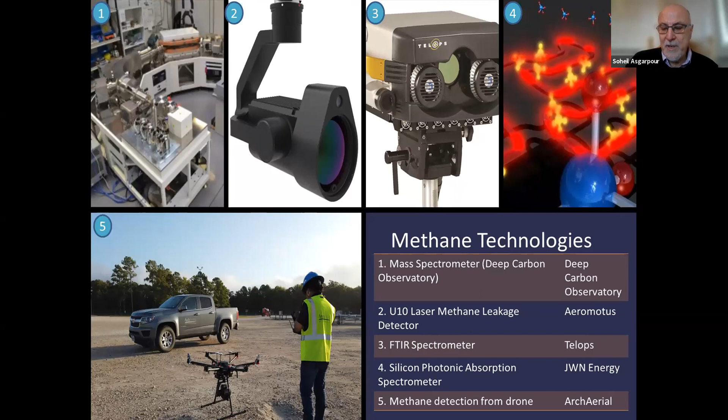For many years, the global impact of methane emissions remained under the radar because it is odorless and colorless. However, technology has changed this concept and perception.

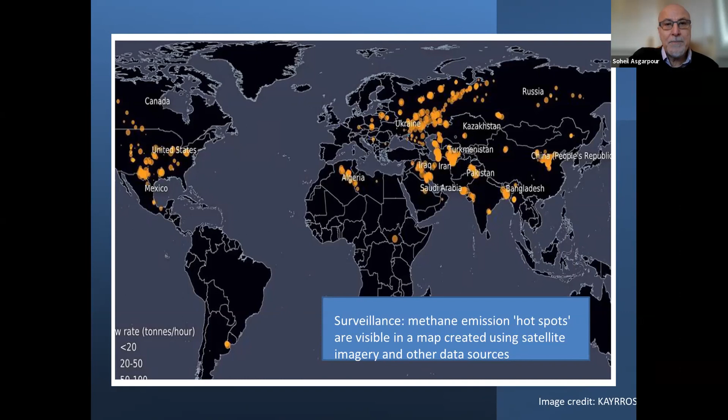Methane is the second largest greenhouse gas. The current annual global methane emissions are around 570 million tons, of which approximately 40% of the emissions are derived from natural sources. That would be sources like wetlands and forest fires, etc. 25% is from agriculture, 23% from oil and gas, and the remainder from landfills.

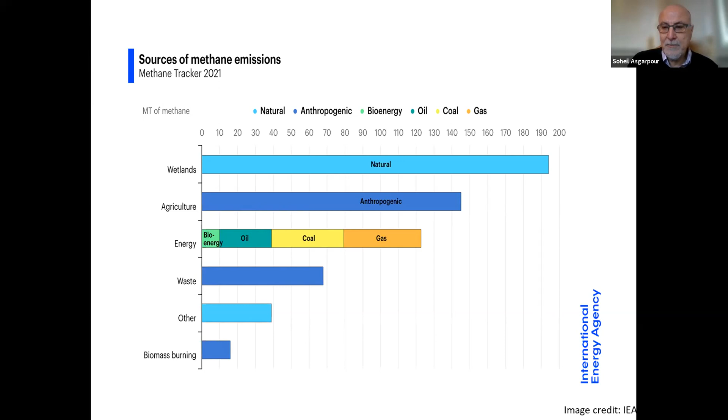The impact of various greenhouse gases is determined by the duration of time they remain in the atmosphere and their ability to absorb energy. Although methane has a much shorter lifespan, around 12 years compared to centuries for CO2, it is by far a more potent greenhouse gas.

To estimate methane's effects on global warming, the most commonly used method is the global warming potential, GWP. Eddie actually mentioned this. This method considers methane to be equal to somewhere between 28 to 36 tons of CO2 equivalent if you are looking at it over 100 years.

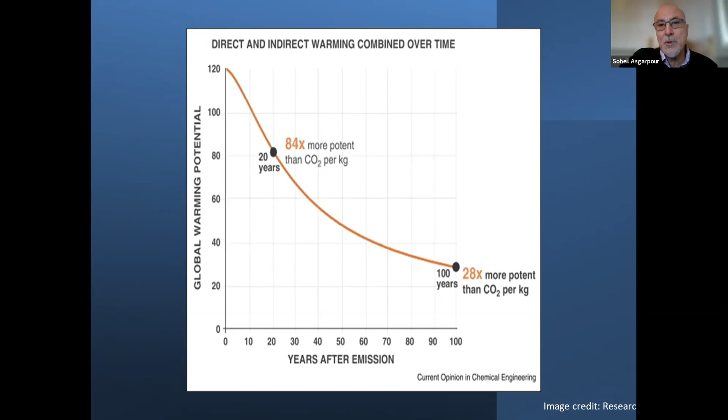But let's look at it over just the next 10 years. It's 90 times. And why I'm saying that, because the IPCC has stated that the next 10 years will be the most crucial in controlling climate change. So if you look at it during that 10-year period, then essentially the impact of methane becomes almost equal to the impact of CO2. So it's extremely potent, as I mentioned.

Sources of methane emissions are fugitive, which is unintentional, and venting, which is intentional. The largest sources are venting from oil and condensate tanks and pneumatics, etc. Our current studies indicate that this information is going to change, because we are seeing more impact coming from oil tanks and condensate tanks than pneumatics. Those studies are going to be public very soon.

I should also say that methane vented from oil and gas affects not only our environment, but also our health. This sounds daunting, but reducing methane emissions provides tremendous health, environmental, and economic benefits. And talking about economic benefits, I think reduction of methane emissions is the fastest and most cost-effective approach in reducing greenhouse gas emissions globally. Methane, unlike CO2, has commercial value.

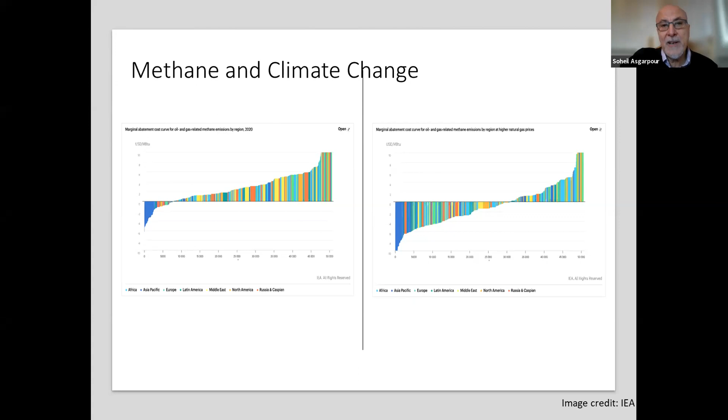Methane is the key to creating a clean Canadian oil and gas brand. Methane reduction allows more natural gas to be sold for profit while simultaneously improving our environment. Finally, methane is the catalyst where traditional oil and gas and leading-edge clean tech meet. It has the potential to forever change how we do business by helping small and medium-sized clean tech companies prosper nationally and internationally. And later on, you can see our game plan to do so.

According to the Energy Information Administration, EIA, the future of electrification is here, and natural gas is going to play a very important role in supporting the energy transition. The EIA expects the demand for natural gas for generating electricity to go up by 25% by 2050.

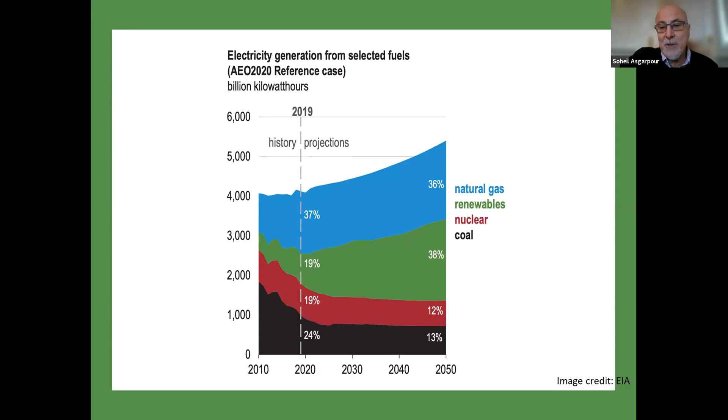Eddie actually articulated this really well. Natural gas can be converted to hydrogen or can generate clean energy, but the key is to make sure that we reduce methane emissions from production, processing, and transportation of natural gas. So let's talk about PTAC's initiatives.

More than a decade ago, we started working on initiatives to reduce methane emissions. We formed the Methane Emissions Reduction Network to be an innovation network with a vision to build methane detection and mitigation technologies, with the goal to help build enough technology capacity to reduce 45% of the 2012 level methane emissions at a cost of less than $5 per ton of CO2 equivalent by 2022. Actually, we have achieved that target now, and 90% by 2030.

The network developed a technology roadmap. It connects people, ideas, projects, technologies, capital. It works in collaboration with Clean Resource Innovation Network and Canadian Emissions Reduction Innovation Network, CERIN. It launches and holds numerous seminars, webinars, conferences, workshops, etc. per year.

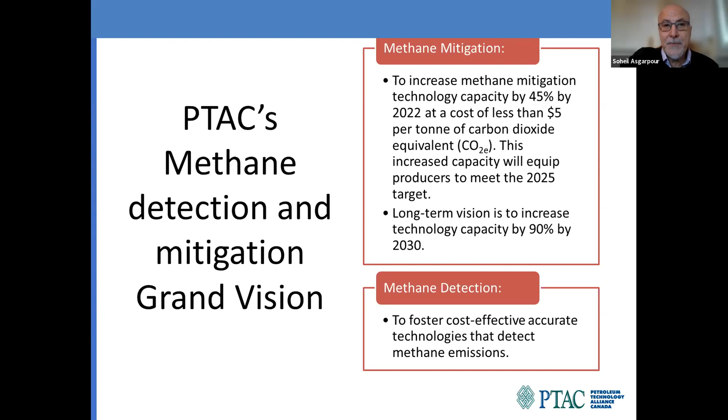I thought maybe I should start first with the low TRL, technology readiness level, of our research and development activities. So I thought maybe I should talk about the applied research work that we have done, which is about developing best management practices to reduce oil and gas sectors' methane emissions.

So throughout the years, we launched and completed over 450 applied research environmental management projects, spending over $180 million. Over 40 of these projects are dedicated to methane detection in helping producers with best management practices, while policymakers and regulatory bodies can use the scientific and engineering facts for developing smart policies and regulations. All of this work is peer-reviewed, and so it has the respect of the public and academia.

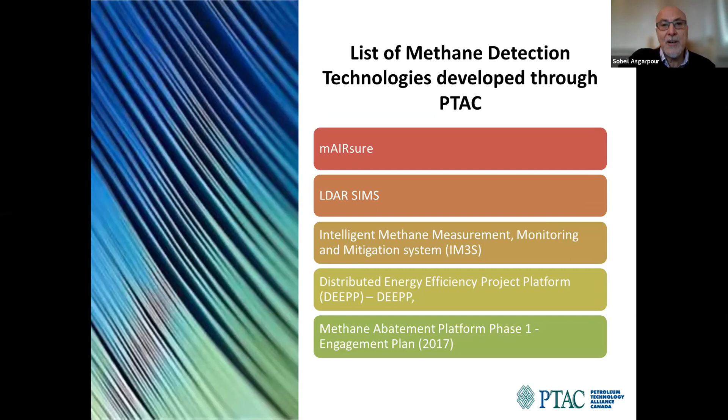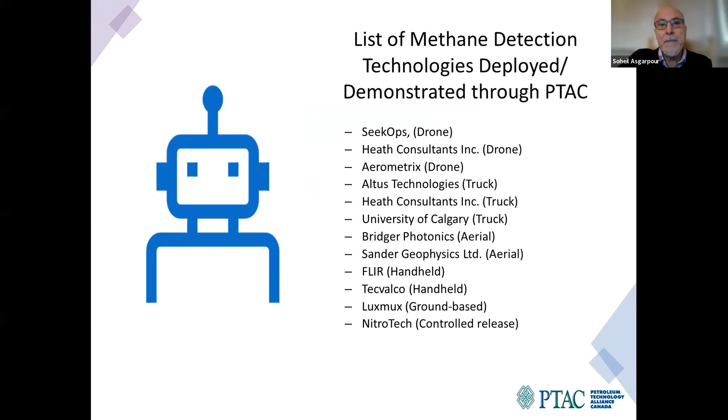In addition, we've also developed 12 technologies, mainly using various sensors, drones, trucks, etc., as you can see here on this slide. One of the biggest challenges we are facing, and we are still trying to find good solutions for it, is methane emissions from oil tanks and condensate tanks, because the emissions are very erratic. Our current focus is to find solutions, maybe even using machine learning, for this challenge. By solving this problem, I think we can get very close to the 75 to 80% methane emissions target that we are working toward.

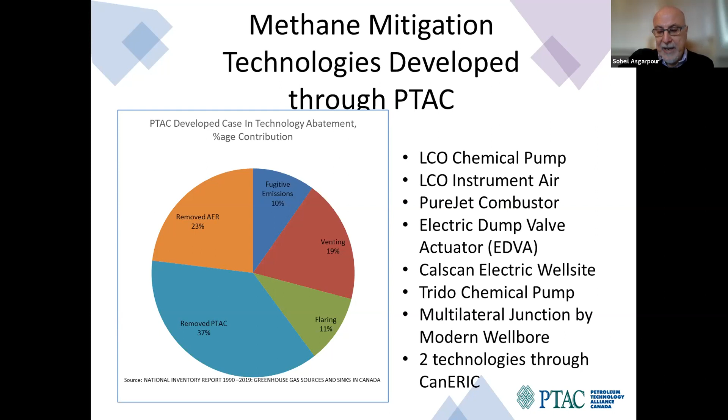Over the past 15 years, PTAC has secured funds from NRC IRAP programs, Alberta Innovates, NRCan, and Emissions Reduction Alberta to help SMEs develop their technologies. The methane mitigation technologies developed through PTAC collectively are essentially providing technologies around 37%.

But one of these technologies that we have used and is already in place is called REMVue technology. REMVue technology captures light hydrocarbons from condensate tanks, from oil tanks, and these days mainly from compressors, and utilizes it in the field for fuel. The emissions reduction is equal to taking 130,000 cars off the road annually, while also saving industry $15 million in energy costs.

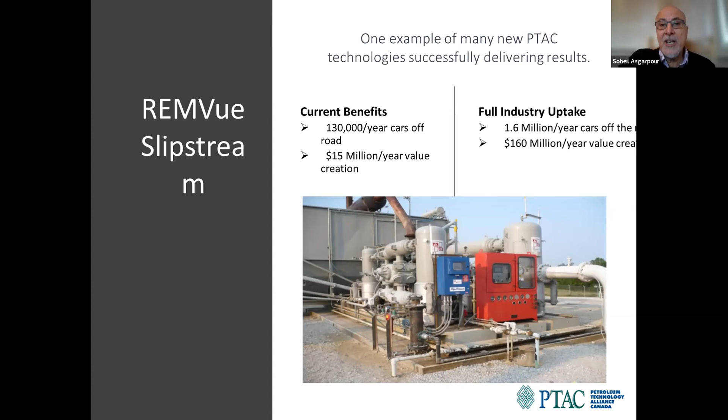Having said that, the challenge of this technology is that the uptake is still really low. This is something I'm going to talk about later on.

By securing funds from Alberta Innovates and NRCan, and with industry support, we have been able to help small and medium-sized enterprises field test their technologies at zero cost to them. So far, 3 technologies have been lab tested, 9 technologies have been field tested or developed, and 6 technologies are undergoing various tests.

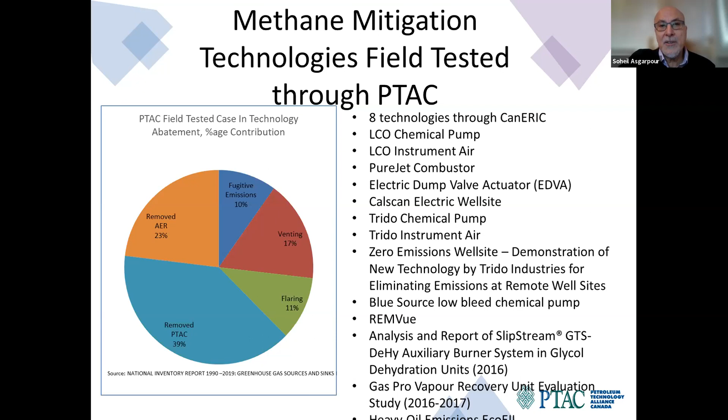Even if a technology is field tested and proven to be cost effective and reduce methane emissions, SMEs still face the challenge of increasing the market uptake of that technology. To mitigate this challenge, we launched 2 consortia that pay up to 75% of the cost of equipment and installation, encouraging Canadian producers to get first-hand experience with the new technologies, so they would do a mass deployment and increase market uptake. These aim to increase investment in massive deployment, and the results we are getting suggest it has been very successful.

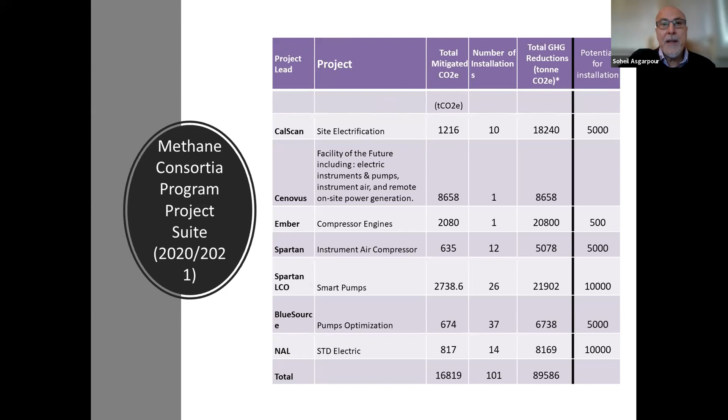Methane mitigation technologies that have been field tested and demonstrated are shown here. Again, many of them are technologies that I have talked about. Collectively, they increase the technology capacity by 39%.

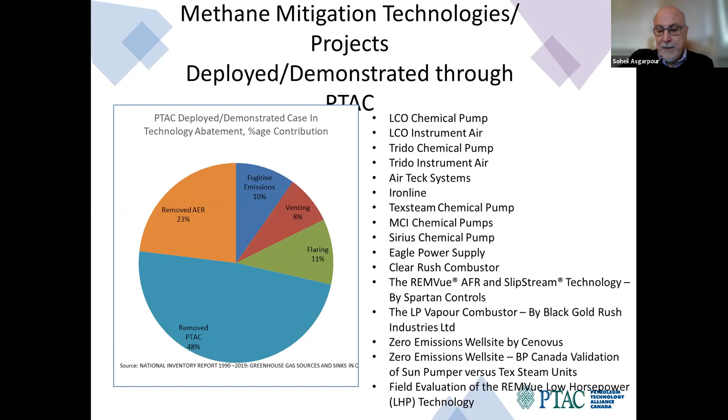To further increase the market uptake of SME technologies, we also created a guide and directory listing over 59 Canadian cleantech companies looking to bring their methane technologies to the international market. We are working with Canadian trade commissioners and Global Affairs to promote these technologies. PTAC's product market fit assessment also helps cleantech SMEs prosper. Last year alone, we completed 55 assessments with financial help from NRC IRAP and launched 20 consortia to help SMEs achieve economic prosperity. In the coming year, PTAC will launch several new initiatives to expand our international activities, including a strategic program to increase international sales of Canada's cleantech products and technologies.

In closing, reducing methane emissions requires global collaboration. It is through this collaboration that PTAC has achieved so much. So we really need to work with everybody to get good results on achieving net zero.

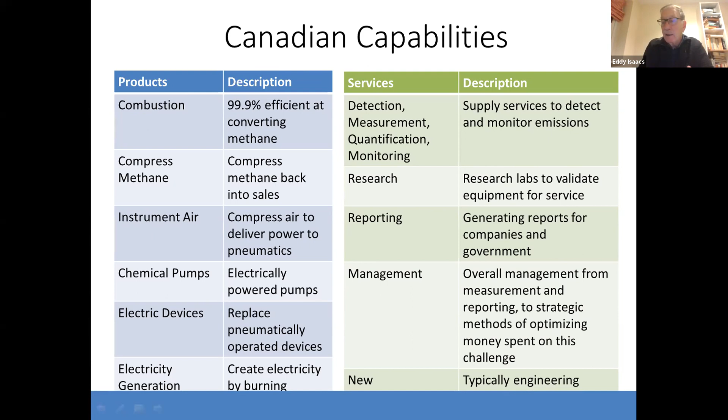And back to you, Eddy. Well, thanks very much, Soheil. This is an impressive amount of work that's happened. Maybe because I went away, a lot of good things have happened, and congratulations. It is the other way around, Eddy. You actually essentially set the foundation for everything that has happened here. So I don't know how to really thank you. Yeah. Really impressive, and thank you very much for your presentation.

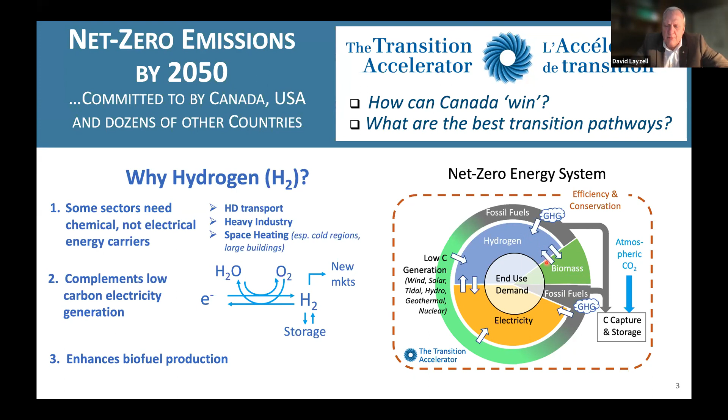I think it's important to recognize that we already, in Canada and around the world, have a very vibrant hydrogen economy. In Canada today, we make about 8,200 tons of hydrogen every day. And that hydrogen is involved with producing a greenhouse gas emission. It's called gray hydrogen. For every ton of hydrogen, there's around 9 or 10 tons of CO2 going into the atmosphere.

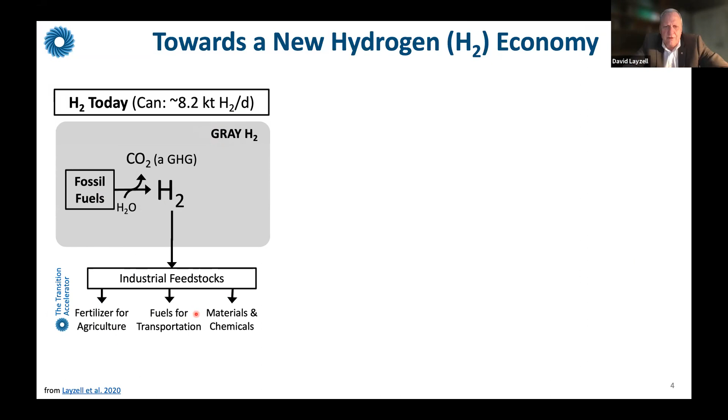That hydrogen is used to make fertilizer for agriculture, to make fuels for transportation. It's used to crack bitumen into synthetic crude oil, or to convert various kinds of crude oils into gasoline, diesel, jet fuel, et cetera. And it's used to make other chemicals and materials.

As we look to a net zero future, what we're looking at is changing the way that we make the hydrogen. We could still use fossil fuels or even use biomass, but instead of releasing the CO2 to the atmosphere, we can capture that CO2 and geologically sequester it. We can also make hydrogen from renewables or nuclear or other low carbon sources of electricity and use the electricity to crack water into oxygen and hydrogen. And there's also some hydrogen produced as byproducts of chemical process plants like chloralkali or sodium hydroxide plants.

And the vision is that in this new hydrogen economy, the hydrogen's not only used as an industrial feedstock, but used as a fuel in its own right, as an end-use fuel to support transportation, building, industry, and power generation, and even to be an export product for Canada, which is a significant opportunity.

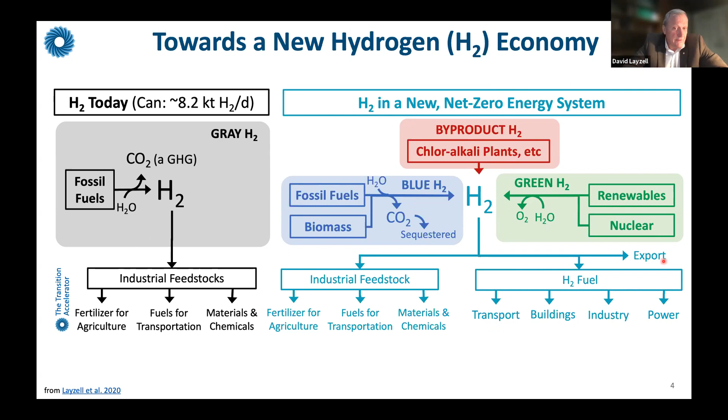So let's look at the value chains in this new hydrogen economy. How do we envisage this hydrogen economy looking by mid-century? Well, we talked about green hydrogen production, where low carbon, zero emission electricity is used to crack water into hydrogen and oxygen. There's also a possibility of blue hydrogen, biomass or natural gas or oil going through gasifiers or reformers to crack those into hydrogen and carbon dioxide. The carbon dioxide obviously has to be kept out of the atmosphere. So that's the first part of it.

The oxygen that's produced from the electrolyzer, most times today, is simply released to the atmosphere. But in a low carbon net zero energy system, that oxygen can be used to replace the oxygen in the atmosphere. And that allows us to maybe continue to use natural gas or other forms of fossil fuels. But because the gas produced as an end result contains no nitrogen, because you're not using atmospheric nitrogen, it contains virtually pure CO2 or CO2 and water. You can remove the water relatively easily and get virtually a pure CO2 stream that can be sequestered geologically.

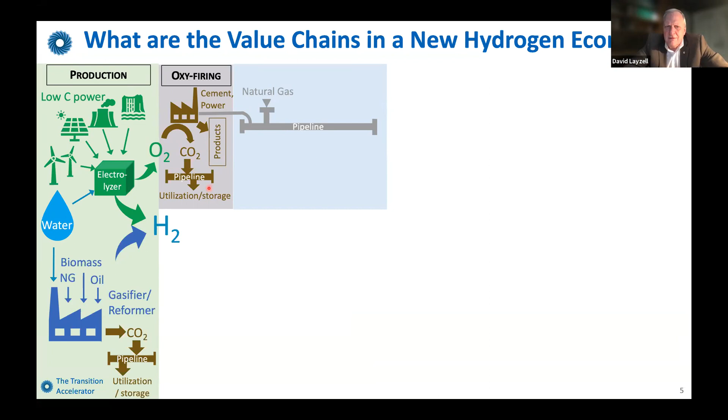And this can allow us to run cement plants or even power production on fossil fuels with pure oxygen. And there's an opportunity that opens up with lots of green hydrogen production.

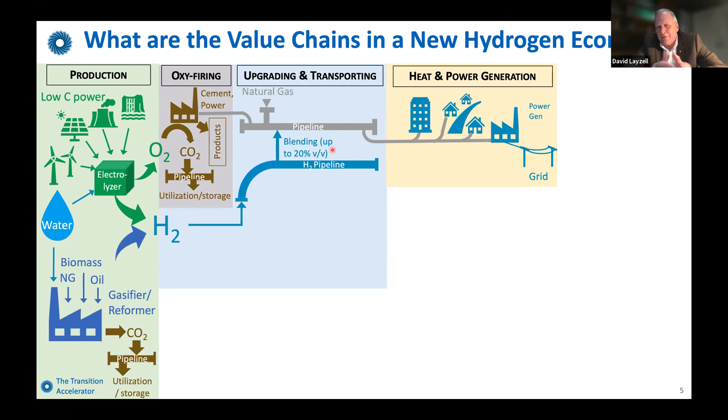The hydrogen could be used, and this is some of the early stages of hydrogen use in energy systems, often in Europe and also starting in Canada, where the hydrogen can be blended into natural gas to help start to decarbonize our existing systems, for example residential or commercial buildings, or even power generation. Blendings of up to 20% by volume, which is only about 7% or so by energy content, you don't typically need to change much infrastructure. You can use the existing infrastructure. But obviously, that's not going to get us to a net zero energy system.

What is being looked at a lot in Canada and internationally is the possibility of putting pure hydrogen into space heating for residential and commercial buildings, or even pure hydrogen for power generation. That will require some new equipment: new burners or new boilers, furnaces, cook stoves in houses, or gas turbines for power generation.

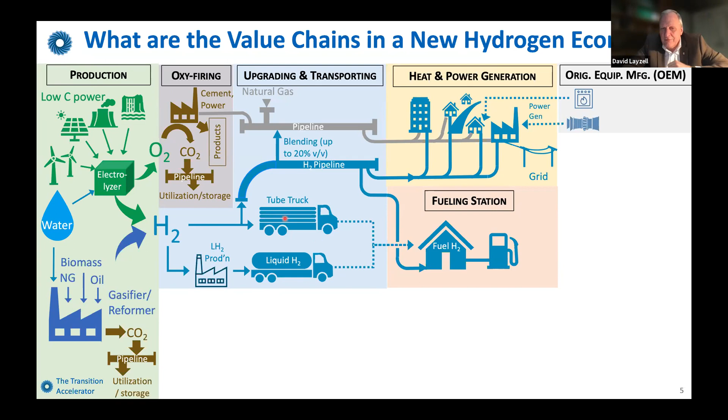The area where hydrogen is often seen as having the biggest opportunity is transportation, especially heavy vehicle transportation. In which case, hydrogen can be taken from a hydrogen pipeline and delivered to a fueling station, or the hydrogen can be compressed into a tube truck, and each tube truck can hold perhaps up to 1,000 kilograms or 1 ton of hydrogen, which isn't very much actually, which makes the tube truck rather an expensive way to move hydrogen around. Or the hydrogen can be reduced in temperature to about 253 degrees Celsius below zero, and it turns into a liquid.

And the hydrogen then can be put onto a truck as liquid hydrogen in a cryogenic container and delivered to the fueling station. And of course, the opportunity here is to use that hydrogen to support heavy vehicles in particular, everything from airplanes and trains and ships, off-road vehicles, a lot of Class 8 trucks and bigger vehicles that are used a lot, municipal buses, etc.

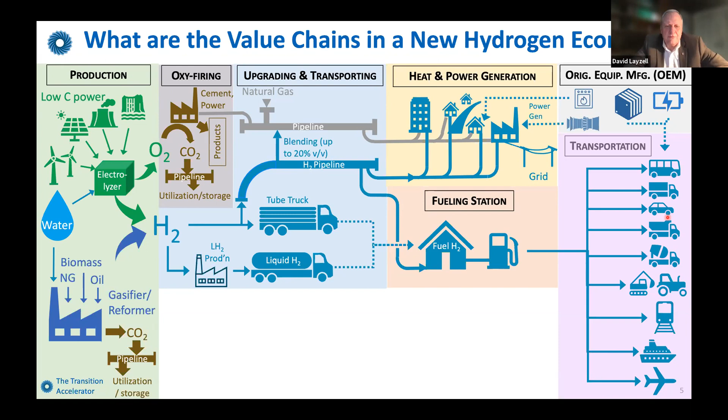There is a role perhaps for cars, but it's probably only not for personally owned vehicles, but for fleets of vehicles that are used very heavily and over long distances. And we'll talk more a bit about some of these alternatives.

Then the other part of the hydrogen economy that there's a lot of interest in Canada and internationally is the possibility of using hydrogen as an energy carrier for export. And this could either be done as exporting liquid hydrogen production, perhaps by train to tidewaters where it puts on a ship, or one that is really getting a lot of attention in the last couple of years is converting the hydrogen to ammonia.

Traditionally, that's thought of as a fertilizer. But hydrogen and ammonia is a lot of energy embedded in those molecules, and that can be supplied for export markets. And indeed, Japan has made it very clear they want to import millions of tons of ammonia per year as an energy carrier.

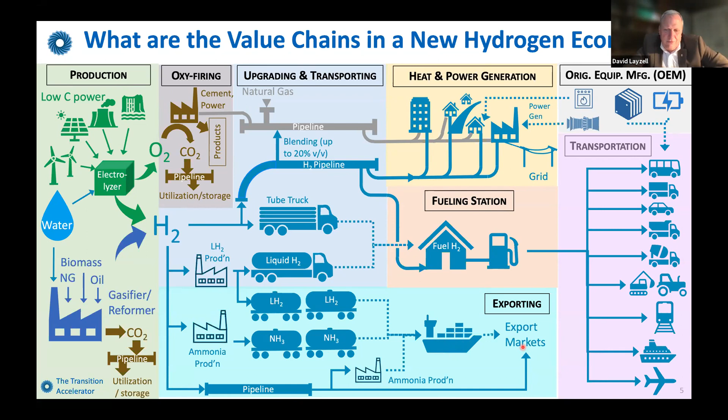And that could either be produced and taken by train, or perhaps a pipeline that would take ammonia produced at the coast. And of course, there's a possibility of pipelines delivering hydrogen to other jurisdictions in North America, et cetera, from Canadian sources. So Canada has an opportunity because we're internationally recognized as amongst the world's lowest cost producers of both blue hydrogen, that's made from carbon-based sources, and green from electrolysis.

So Canada has low-cost blue and green hydrogen, but what about its environmental footprint? The analysis is that in the process of making hydrogen with carbon capture and storage and using a process like autothermal reforming to make the hydrogen and then capturing the CO2 and sequestering it, that drops the carbon intensity of the hydrogen down to about 0.5 or 1 kilogram of CO2 equivalent for every kilogram of hydrogen.

But then you have to add on the upstream emissions, basically the methane emissions that Soheil just talked about. And in our estimate, that adds another 2 kilograms of CO2 per kilogram of hydrogen, for a total of 3 kilograms of CO2 per kilogram of hydrogen. And that's the best we can really get to today.

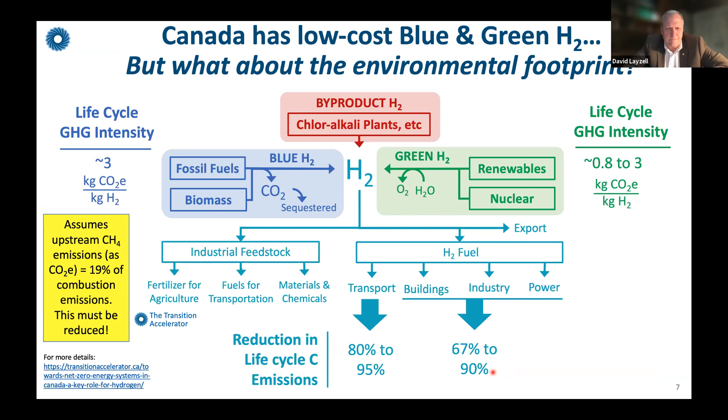It's more difficult today for green hydrogen to hit that target market without subsidies, but the cost of green hydrogen production is coming down with lower cost of electrolyzers and lower cost of solar and wind in strategic locations.

When you have the right conditions, and when you couple solar and wind to electrolytic hydrogen, green hydrogen should be able to get down around the $2 a kilogram range by 2030 in certain regions.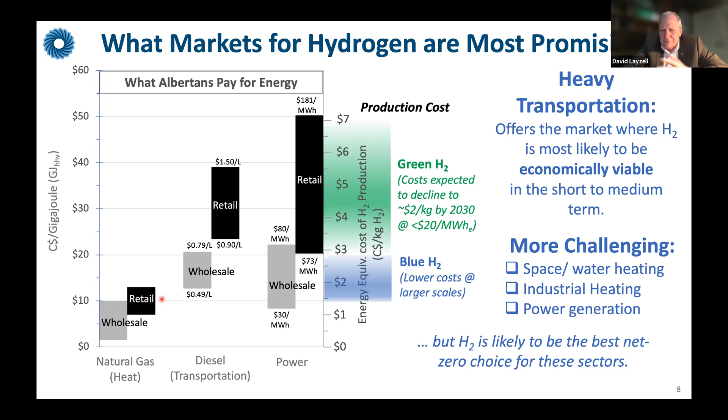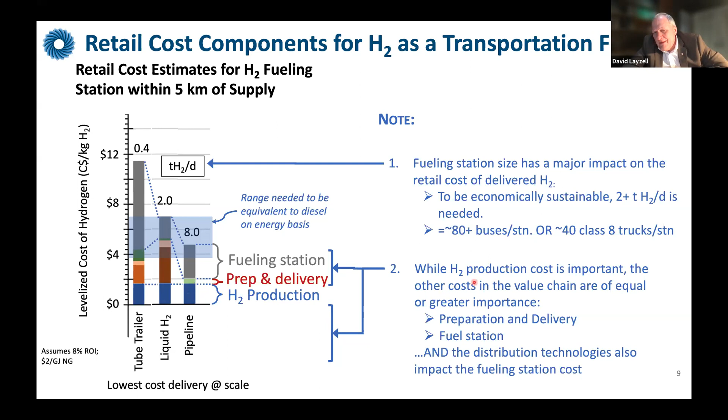The cost of the other parts of the value chain are of equal or more importance: preparation and delivery, highly variable depending on whether you're doing tube trailer, liquid hydrogen, or pipeline, and also the cost of building the fueling station itself. It costs a lot more to build on a tube trailer basis than on liquid hydrogen on the same basis. But with liquid hydrogen, the fueling station cost is lower because the compression can be handled a lot with the liquid hydrogen as you gasify. Pipeline can be some of the lowest cost, but it depends a lot on where you are, the size of the station, and what other demands are in the region for hydrogen.

So I think this is really important to understand: the choices that are going to be made are going to depend very much on region and locality.

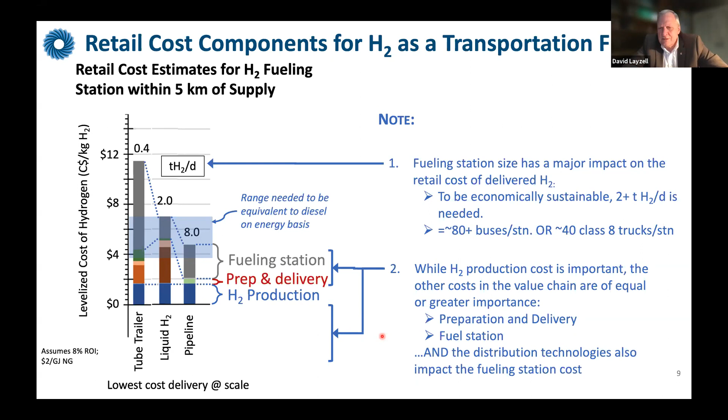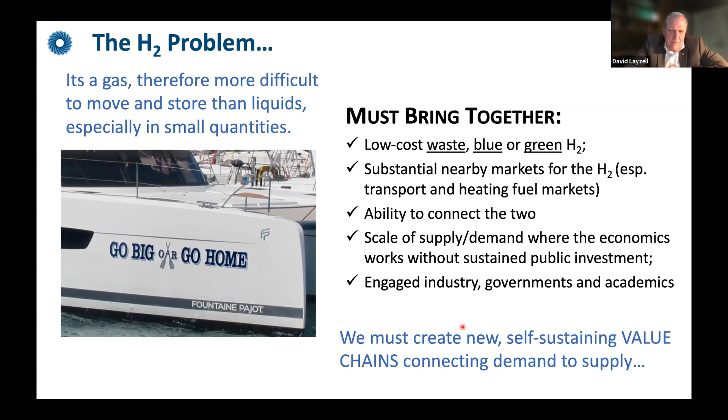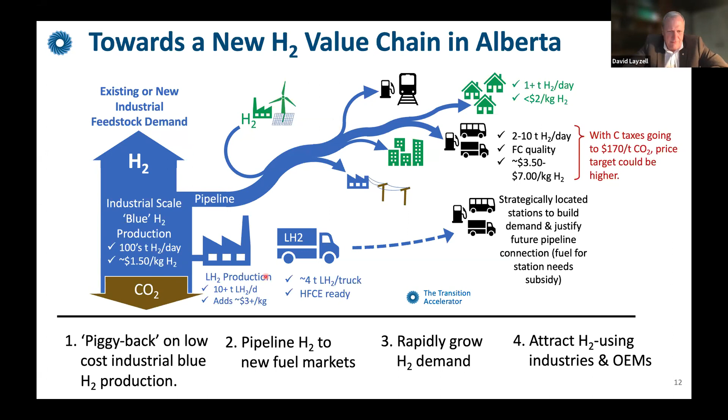There's certainly a role for liquid hydrogen, especially in the early stages of growing this out, but it adds about $2.50 to $3 a kilogram to the price, which makes the economics a little more challenging. But this is the approach we've been using.

And in Alberta, Alberta is already a major center. We talked about Canada producing 8,200 tons of hydrogen, two-thirds of that produced in Alberta for use as industrial feedstock. Within the Edmonton region of Alberta, we already have a lot of the infrastructure, built over the last 20 or so years. There's a 50-kilometer long hydrogen pipeline and 2 CO2 pipelines. The Quest CO2 pipeline goes to the Saline aquifer storage, and the Alberta Carbon Trunk Line is used for enhanced oil recovery.

If you look at this region itself, it's about 2,000 or 2,200 tons of hydrogen per day, a little more even. Some of it, there are 3 plants up here that are actually already making a form of blue hydrogen where they're capturing the CO2 and putting it into these pipelines that we show here.

And indeed, in the last 6 months, we've seen a number of announcements where, both in the Alberta Industrial Heartland and other places in Alberta, there are major announcements of blue hydrogen production initiatives. Suncor and ATCO are talking about major blue hydrogen production, that'll be later this decade. Air Products is talking about one, only about 3 years from now, where they'll be producing 800 to 900 tons a day of hydrogen.

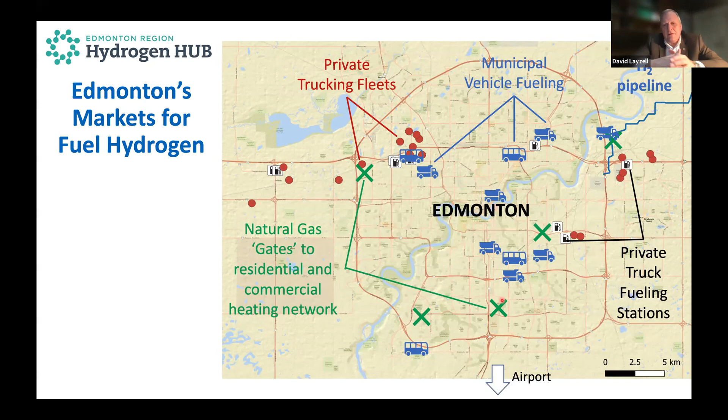We also see here the green X's are the gates where high pressure natural gas is dropped to low pressure, and we see the ability to then inject hydrogen into natural gas systems for space heating for commercial and residential buildings. What I want you to note here is they're on two corridors, which happen to be the industrial corridors through the city. This opens up a really interesting opportunity to put pipeline infrastructure. Indeed, in this corridor in particular, and in the one coming down into the south part of the city, there are a number of abandoned or discontinued pipelines that could possibly be retrofitted for hydrogen movement.

Overall, we've estimated a market potential in Edmonton alone, just in this region, of about 670 tons of hydrogen per day for transportation. That's mostly the diesel market, a little bit of a gasoline market. Building heating could be another 1,500 tons a day to support the space heating if we went to 100% hydrogen, plus export markets of many thousands of tons per day of potential export markets.

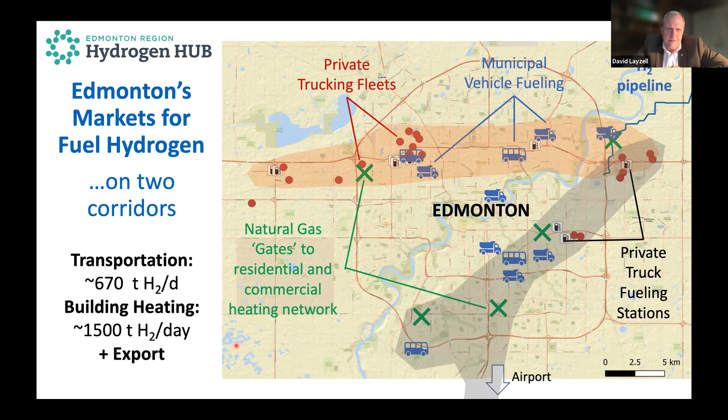So let's just now talk a bit about some of the issues around this new value chain, and where is the power and control in this value chain, and how does it compare maybe to some of our existing value chain for heavy transport in this sector.

And of course, this is challenging because this sector happens to be highly competitive, and they don't tend to work collectively as much as perhaps some other sectors. And they're smaller companies, literally 17,000 companies in Alberta alone in that sector for heavy vehicle transport.

The OEMs and the retrofits, now these tend to be global companies. And Canada is competing for their attention to build vehicles that will actually meet the needs of our markets. When you consider the weather we have, especially in Alberta with the snow and sleet and everything else, it's much more attractive for them to focus their attention on places like Arizona or California than Alberta. But the reality is that when we talk to them, the most important thing they're looking for is that the key stakeholders want to buy their vehicles, and that will get them to work with us.

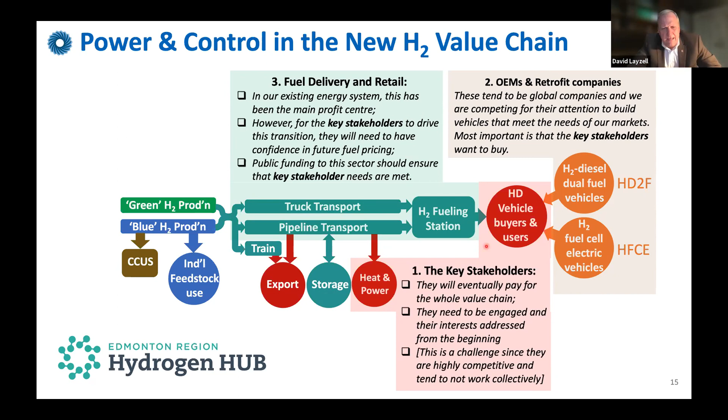And then finally on the fuel supply, the reality is that the companies that are making hydrogen and can make blue hydrogen and green hydrogen, there's a lot of them out there who see the possible economic opportunities in this new value chain, and they're very keen. They're also asking for public subsidies, but they need to be tied to, again, some level of confidence in the prices of the fuel, at least until a competitive economy exists in this area.

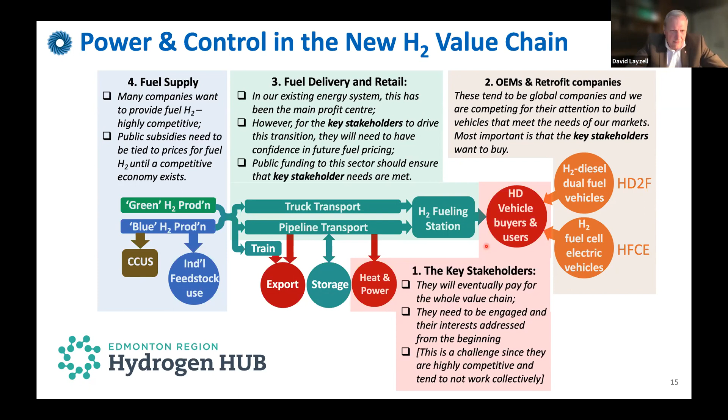So in the Edmonton Region Hydrogen Hub, which has been set up around the incredible opportunity in the Edmonton region, we've been doing a number of projects that I'll mention very briefly before I wrap up. First is AZETEC. We're designing and building two 63.5-ton gross vehicle weight trucks. These are very large trucks, and they're going to be running the Edmonton and Calgary route. They're being designed by Dana Transport and Ballard, with a project run by the Alberta Motor Transport Association, and the estimated time of arrival will be January, a year or 14 months from now, when they'll be on the roads.

There is the AZEHT project. This is a zero emission hydrogen transit project involving Edmonton Transit, Strathcona, Calgary, and Roam. But Edmonton and Strathcona in particular, two hydrogen fuel cell electric buses. We just received the funding for this, and those buses will be on the road in August 2022.

CP Rail has announced some really exciting work that they're doing. They're putting 3 diesel electric locomotives on the rail. The first one will be on the rails, not on the road, in 2022.

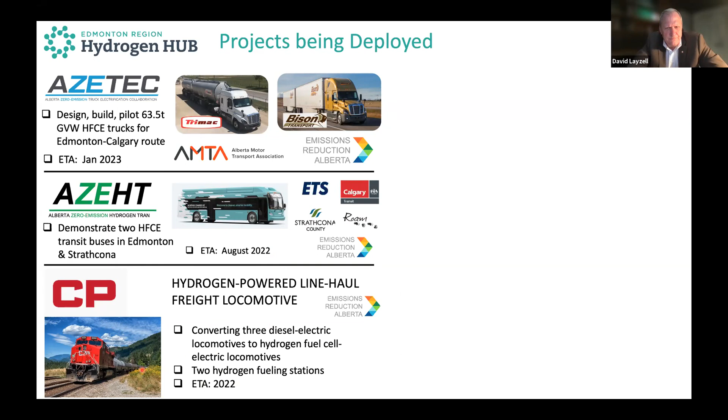Then we're looking at a number of companies and a number of projects on hydrogen diesel dual fuel technologies, where hydrogen is injected into the diesel engine and it improves the combustion of the diesel fuel. But what it really does is it replaces about 30 to 40% of the diesel fuel requirement. And we see this as a really important bridge technology for creating fueling station demand and building out the fueling station network while also reducing emissions.

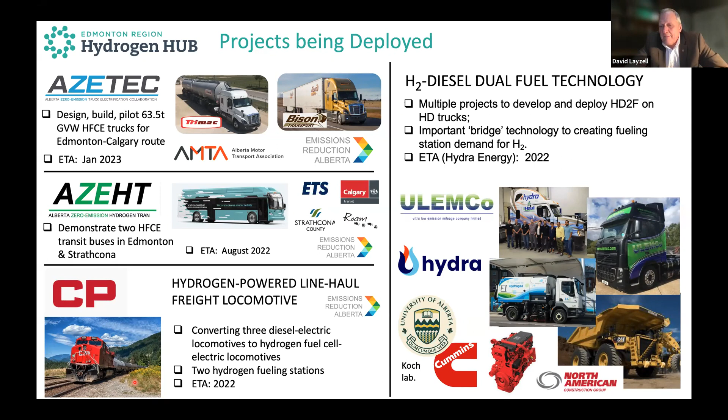We see fuel cell vehicles as a long-term solution, but this is an interim solution, which in our models is really important in keeping the need for public subsidies down and really deploying rapidly a hydrogen economy in the next few years.

We're also working with the Alberta Motor Transport Association to run a roadshow where we're taking hydrogen diesel dual fuel vehicles and fuel cell electric vehicles that are commercially coming out in the next year or two in North America, and providing carriers hands-on experience. And we just received some funding to get this off the ground. We hope to see a lot more.

We've been working with a number of companies about the concept of providing the fueling stations, and Suncor in particular. It's been announced recently that we've got some funding. The first fueling station will be going in in the next few months to serve some of the projects I've just talked about. And we're hoping to see a major expansion in that area.

There's also a number of projects that have been launched in Alberta, and I've just mentioned 2 of them I think are quite important. One is looking at actually making hydrogen directly from natural gas without the steam methane reforming or autothermal reforming, doing it by methane pyrolysis, where you produce carbon black instead of CO2. And the carbon black then can either be converted into rubber tires or paints, or basically make something else with the carbon black, just keep it out of the atmosphere as CO2. And ATCO is looking at blending 5% hydrogen into its Fort Saskatchewan infrastructure for space heating in Fort Saskatchewan.

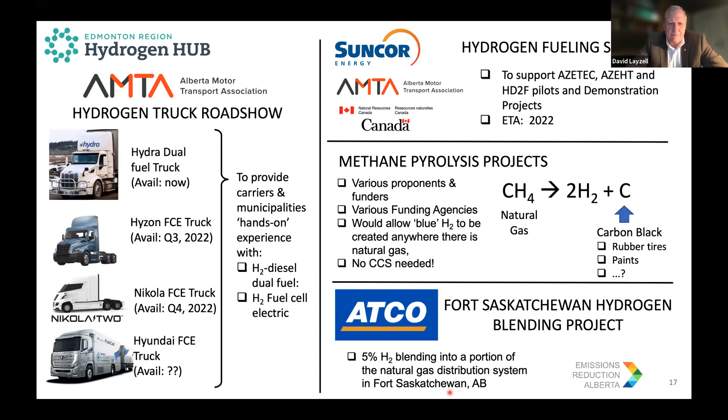So what is the magnitude of the opportunity? Very briefly, I would like to touch on 4 things just to give you a sense. They're all focused on Alberta. I'm sorry, I know this is more about pan-Canadian, but this gives you a sense of the scale of the opportunity. Alberta uses a lot of diesel fuel. Almost 280 petajoules of diesel per year is shown here.

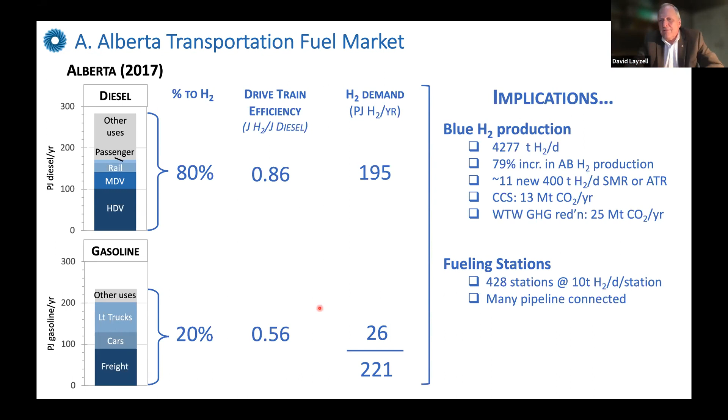If 80% of that went to hydrogen, and hydrogen in a hydrogen fuel cell electric has a drivetrain efficiency where a joule of hydrogen will take a vehicle further than a joule of diesel fuel, there would be about 195 petajoules demand; when you add some from the gasoline, maybe 220. This would require production by 2050 of an additional 4,200 tons of hydrogen per day, which is about a 79% increase in the current Alberta hydrogen production of about 5,400 tons a day.

And that would require CCS, carbon capture and storage, of about 13 million tons of CO2 per year, and over 400 fueling stations at 10 tons a day. These should be highly economically viable. Some fueling stations would be larger than that, of course.

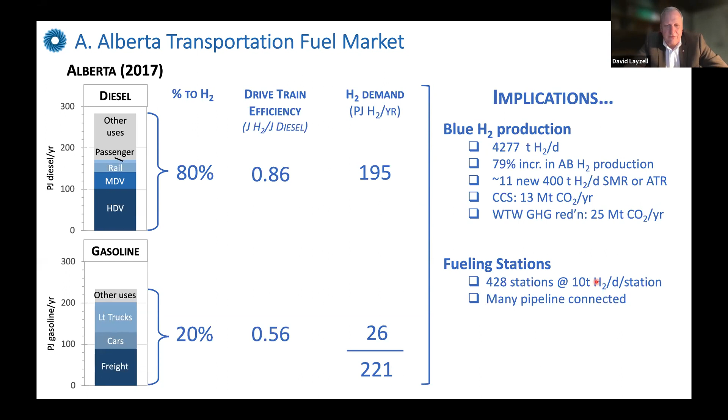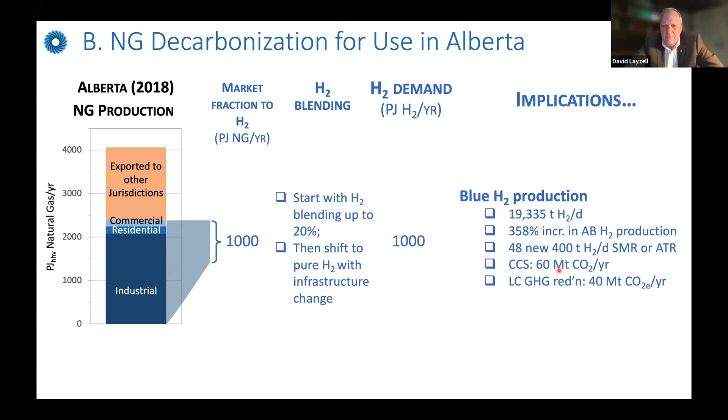If we could look at the natural gas we now export mostly to the United States or to other provinces, this is exported to other jurisdictions. And we're saying, if 80% of that, if say they didn't want our natural gas anymore, but they wanted hydrogen, that would be, at 1,340 petajoules, 26,000 tons of hydrogen per day, another 81 megatons of CO2.

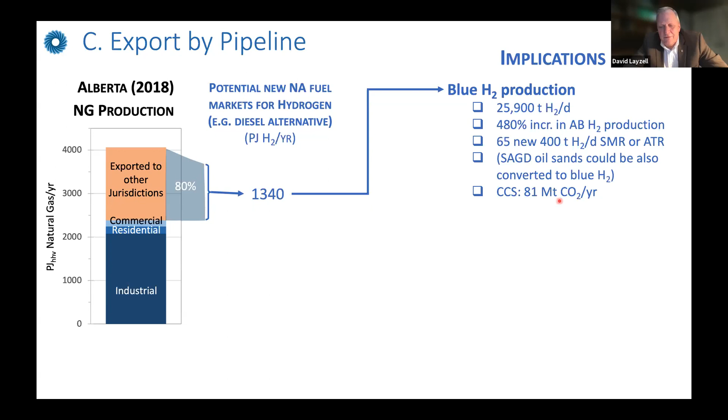Now, green hydrogen could also play a role in this, but to put it in perspective of the scale, if you wanted to make the 26,000 tons from wind, 147 gigawatts of new wind generation would be needed, which is 87 times the current wind generation capacity in Alberta. It's almost 25,000 6-megawatt wind turbines. So there is a market, I think eventually, for both green and blue hydrogen.

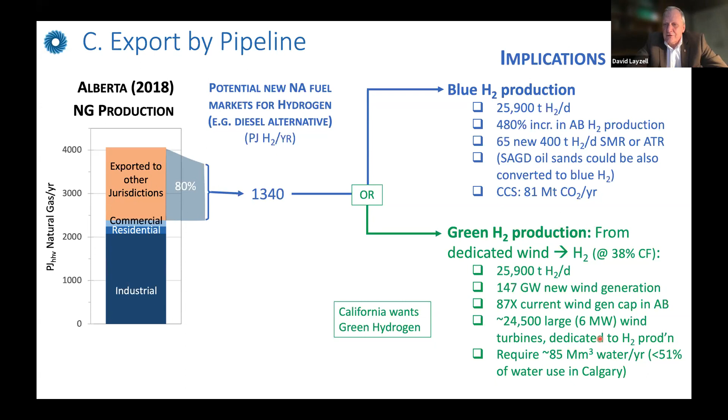I think blue is more likely because of its cost benefits and the ability to get to scale quickly, more likely to build out some of the infrastructure, opening up the opportunity for more and more green as we go on.

And then finally, moving hydrogen to Asia. I talked before about the two interests, either moving it as liquid hydrogen or as ammonia. There's also liquid organic hydrogen carriers that are possible. There are different ways of getting the hydrogen across.

Market demand already is over 8,000 tons of hydrogen per day in Japan by 2030. So we're talking very significant opportunities and economic opportunities. A lot of companies are interested in taking and moving on this opportunity.

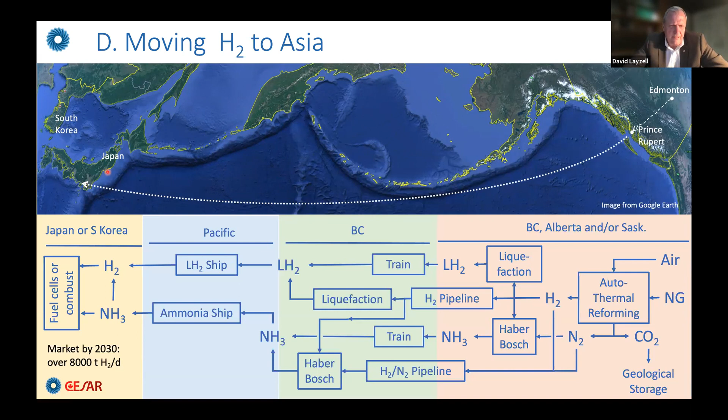So in conclusion, many nations of the world, including Canada, are committed to this transition to a net zero energy system. Canada's poised to lead in this transition because we've got really low cost blue and green hydrogen, and we need to focus on these hubs and corridors to build out demand. And I would argue we need to start right now. Thank you.

David, that was an excellent presentation. You have provided us with exciting ideas, possibilities, new pathways to create, I think, a new industry. And you've described potentially huge opportunities as we move forward with hydrogen as a part of the value chain. So thank you very, very much.

That's excellent. The two of you have done a masterful job, and we are now ready to move into a panel discussion. And I invite each of you to ask each other some questions. As a moderator, I was hoping to be the first to ask questions, but since we've got some excellent questions that have come in, I will start with Soheil and move on to you, David. And if there's time, I do have some questions that I wanted to ask as well.

But let's start with a question for Soheil: your presentation focused on operating facilities. What is known about fugitive emissions from shutdown and abandoned wells? Well, that's an excellent question.